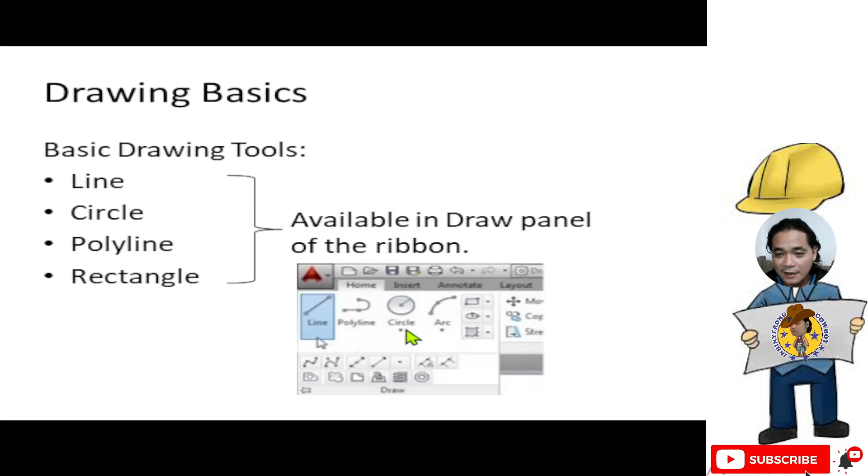Next is drawing lines. Line can be drawn by specifying its start point and end point using the line tool. Okay, so kasi guys, yung line is meron siyang distance, so may start point at end point. At yung distance na yun ay yung nagdo-drawing o yung CAD operator ang nagse-set. So tayo ang naglalagay kung ano yung distance na kailangan natin ilagay sa line. Then yung line, however, there are various methods to specify start and end of line.

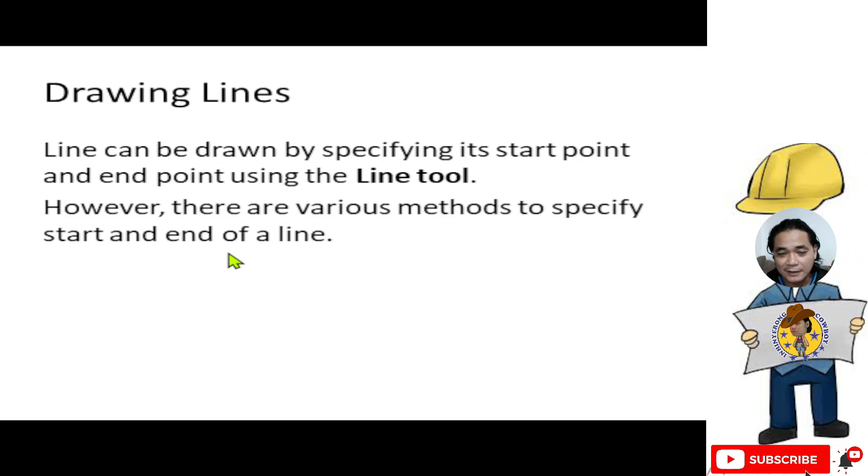Okay, so dito tayo guys sa example number 1. Ang gagamitin natin is using the absolute coordinate system. Okay, so ang una nating gagawin is you will create lines by specifying points in the absolute coordinate system.

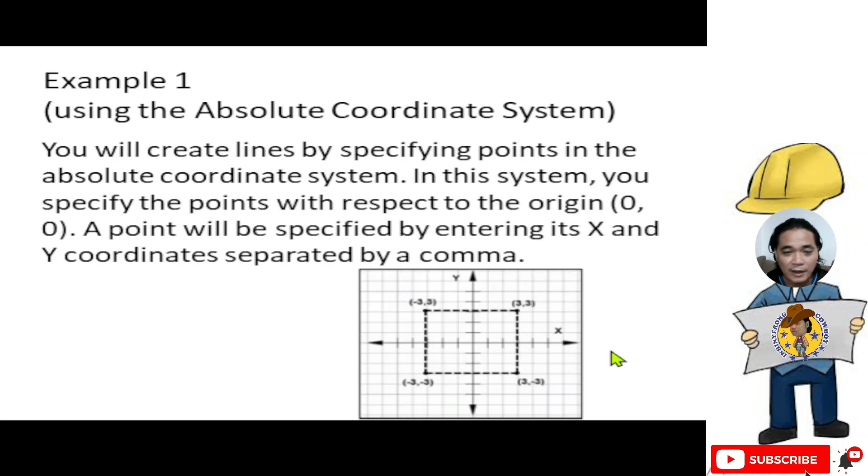Then in this system, you specify the points with respect to the origin 0,0. So ito yun, 0,0. A point will be specified by entering its x and y coordinates separated by a comma. So alam naman natin yung coordinate system ay merong positive and negative x and y component.

Okay, so assuming na na-open na natin yung AutoCAD sa ating desktop o sa ating program. So pag na-open na natin, tingnan natin, punta tayo sa ating AutoCAD. So more on hands-on tayo dito guys, maganda kung meron tayong computer, PC or laptop para masundan natin for our practice. Pero kung wala, okay lang yun.

Manood lang tayo detail by detail sa discussion, para at least pag may computer na is ma-familiarize natin kung ano yung mga na-discuss natin dito. Alam naman natin sa engineering, familiarization is very important. Pag lagi mo siyang nakikita o ginagawa, magiging familiar yung utak natin doon. Kaya nga during reviews sa mga board exams, based on my experience, yung kwarto namin dati puno siya ng formulas nakadikit sa lahat ng wall, even sa ceiling, para always namin siyang makita. Pag wake up namin, makikita namin, kaya magiging familiar kami sa mga formula.

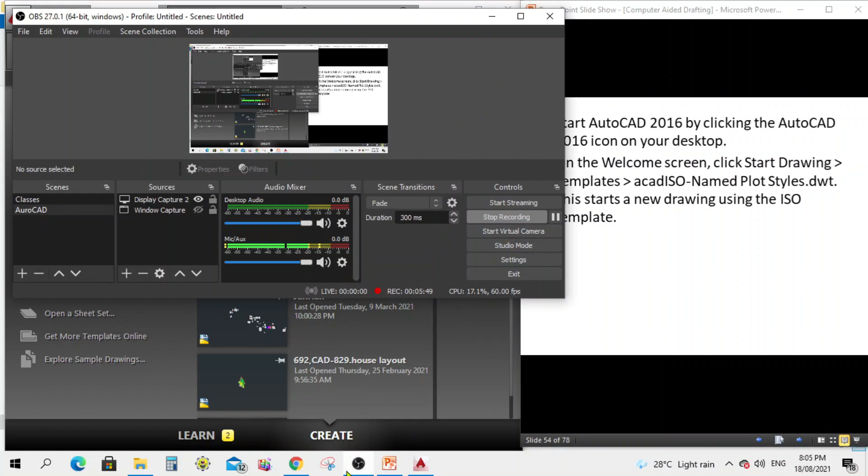Okay, so next natin, tingnan natin. So doon tayo sa ating working station, dito tayo, tingnan natin kung okay. Okay, so ito yung ating AutoCAD, then ito yung ating PowerPoint. In-split natin yung screen para maganda yung visualization natin. Okay, so ito yung ating start drawing, then ito yung ating recent drawings. Okay, on the welcome screen, click the start drawing.

Sa template, so magti-template tayo guys. Then i-select natin. Teka, medyo naglo-loading yung computer. Okay, so ito, pag click natin yung templates, lalabas ito. So ito yung mga pwede natin i-select sa templates.

So as per our procedure, ang sabi dito ay ang i-select natin ay ACAD ISO name, plot styles, DWT. Saan dito yun? ACAD name, plot styles, ito. Name, plot styles, ACAD ISO. Sorry, ISO, so itong sa baba, ACAD ISO name, plot styles, DWT. Okay, so ito ang click natin, click. Okay, so antayin natin, lalabas siya.

Okay, so next natin is i-click natin yung zoom sa navigation bar. So ito yung ating navigation bar, ito yung ating zoom, drop down, then zoom all. So as per our procedure, i-zoom all natin siya. Zoom all, okay, so na-zoom na siya. Mayroong lalabas dito sa command na specify corner. Okay, so okay na siya.

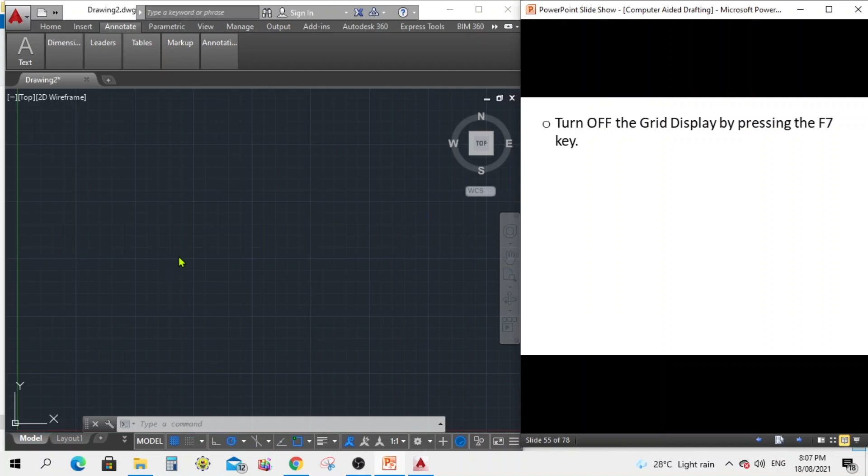F7. So nawala yung mga grid lines. Kung gusto mong ibalik, F7 ka ulit, pabalik. Okay, so as per our procedure, tanggalin natin to.

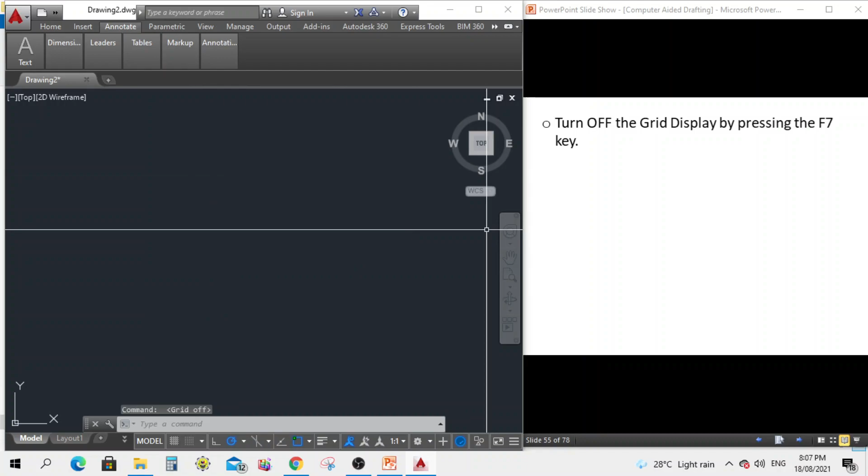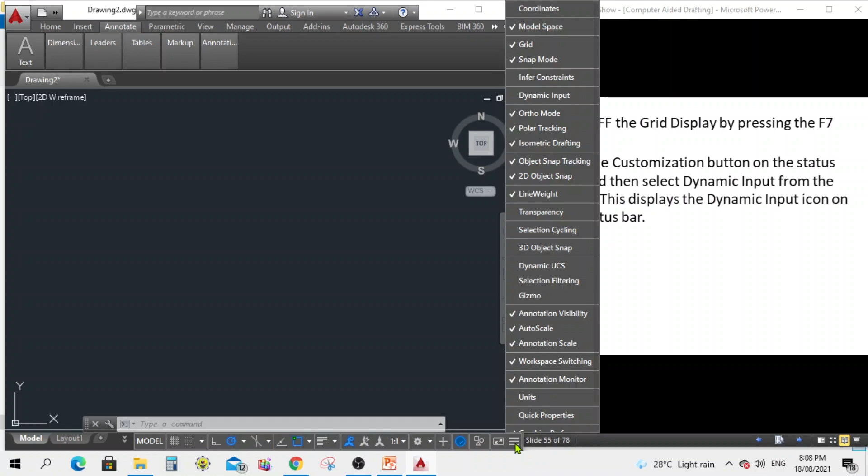Ang next procedure natin, click the customization button on the status bar and select dynamic input from the flyout. This displays the dynamic input icon on the status bar. Select natin dynamic input. So ito yung customization dynamic input.

Naka-on siya ngayon. Ang next procedure natin is turn off the dynamic input icon. You will learn about dynamic input later in this learning session. I-turn off natin siya. Ito yung ating status bar, guys.

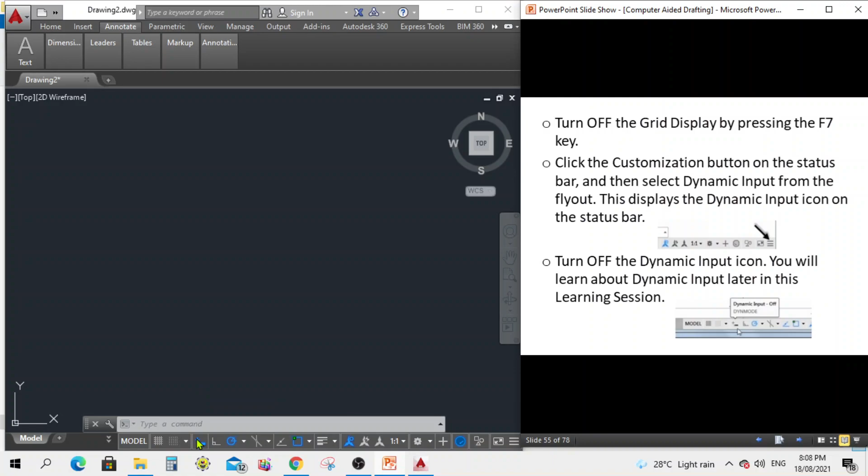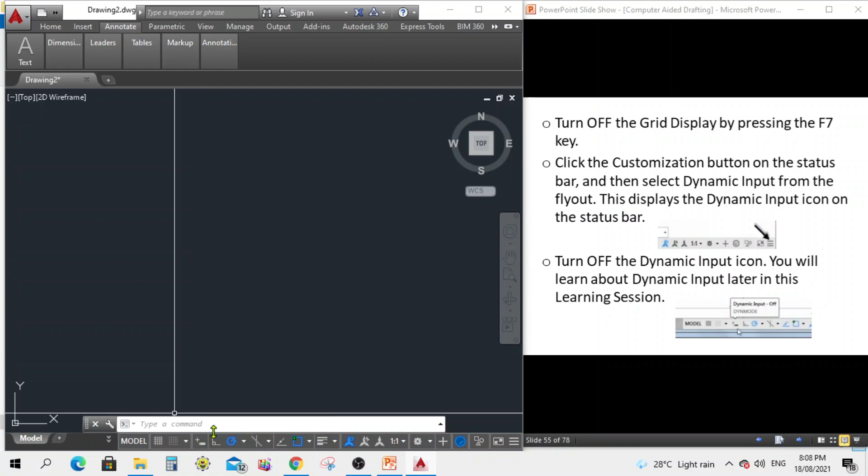So by clicking these icons, magiging off or on yung mangyayari. Pag nagla-light siya, meaning naka-on, so yung dynamic input draw is ating i-off. I-click lang natin to. Left click. Okay, nawala na yung color, meaning naka-off siya. Dynamic input is off.

Next procedure natin, gagawa na tayo ng line or drawing. So to draw a line, click home, draw line on the ribbon, or enter the line or L command. Yung dalawa yung method natin.

Pwede tayo mag-click ng home, dito sa draw, so lalabas to. Piliin natin yung line. Pwede to, i-click natin to, para makagawa na tayo ng line. Or i-type natin sa command, L kung gusto mong shortcut, o kaya i-type natin yung line. Then press enter.

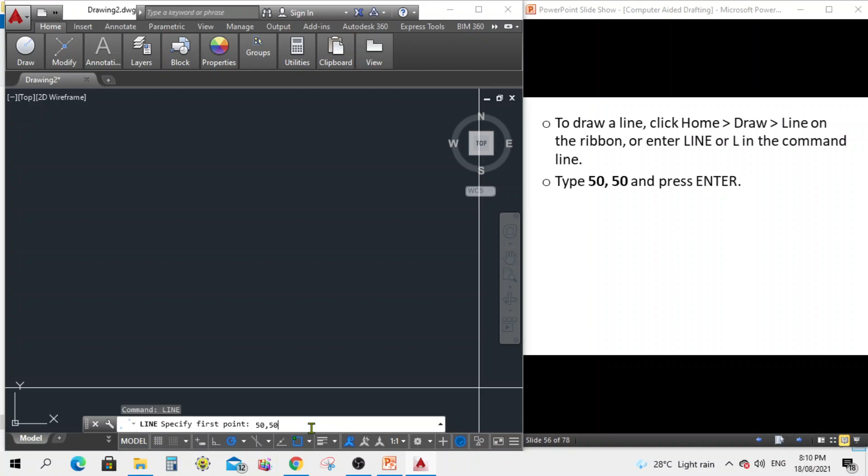Lalabas dito is line specify first point. Tingnan natin sa ating example kung ano yung point na ita-type. So 50, 50. I-type natin ang 50, 50. Then enter. Nandito yung x and y coordinate of 50, 50. Ito yung point niya.

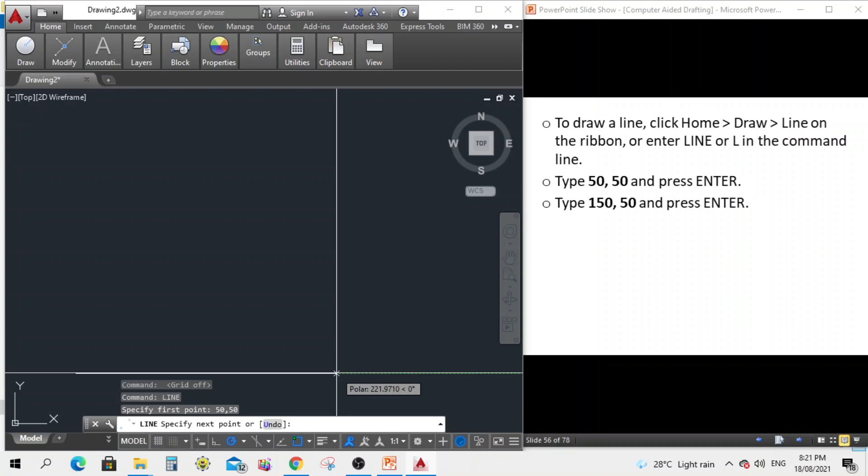Yung next procedure natin guys is 150, 50. Let's type this one in the command line. 150, 50. Press enter. Okay, so this is the line. Then next natin is 150, 100. Press enter. Ito yon yung line na nagawa natin.

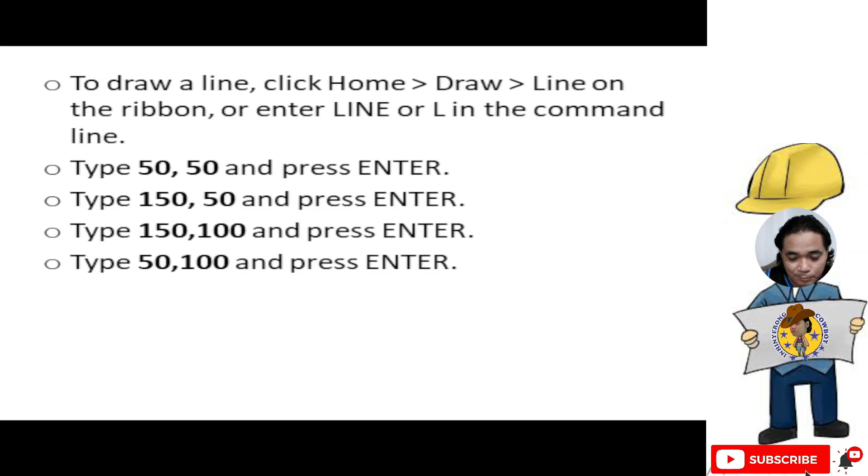Then yung next is 50, 100. Press enter. Kung napapansin natin guys, yung drawing is pwede nating i-close. Yung nakalagay sa ating command is line specify next point. Tingnan natin sa procedure: select the close option from the command line. This creates a rectangle. Ito yung close option natin.

Or pwede natin i-type yung C, then enter. Ito na yung ating drawing. So nakagawa tayo ng rectangle.

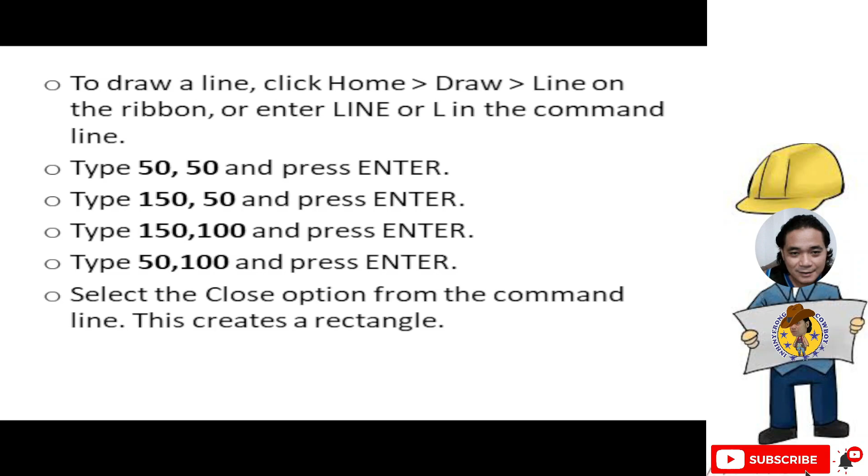Ito yung ating task natin. Ito yung kanyang mga coordinates na ginawa natin kanina: 50, 50, then 150, 50, 150, 100, then 50, 100. So all in positive axis.

Okay, so tingnan natin kung nasa saan tayo. Ito yung nagawa natin guys sa drawing. Ito yung kanyang mga coordinates. Ito yung nagawa natin sa AutoCAD.

I-review natin kung ano yung ginawa natin dito. Nung itong point na to, yung tinype natin is 50, 50. Then itong point na to is 150, 50. This point is 150, 100. Then this point is 50, 100. Then yung huling procedure natin is nag-close tayo sa drawing.

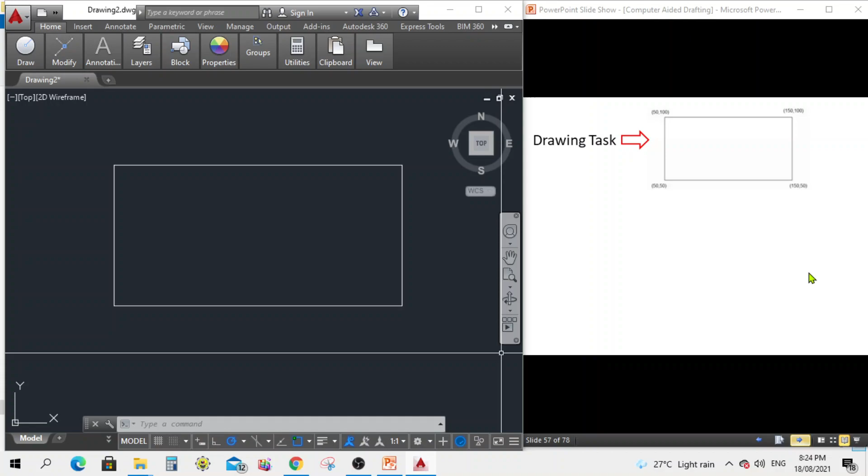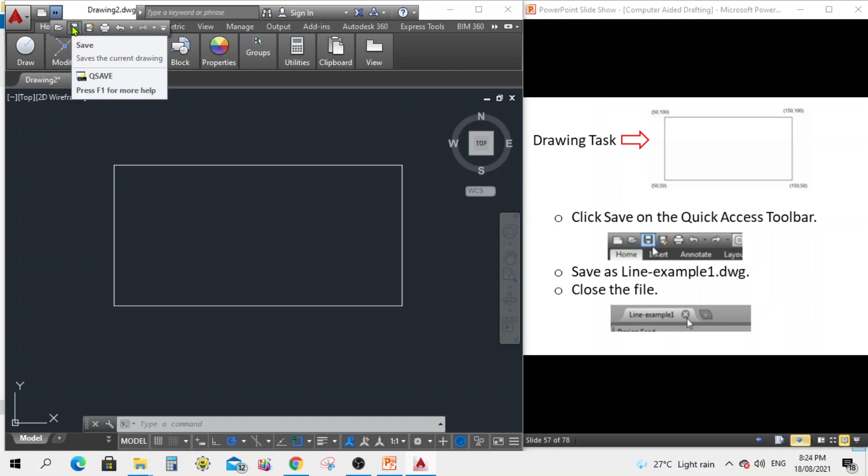Yung next natin na procedure is kailangan na nating i-save yung ating drawing. Click save sa quick access toolbar. Ang quick access toolbar natin is nandito, ito yung dalawang arrow. I-click natin to, then i-save natin. Ang ating file name is line dash example 1, drawing file. Save natin.

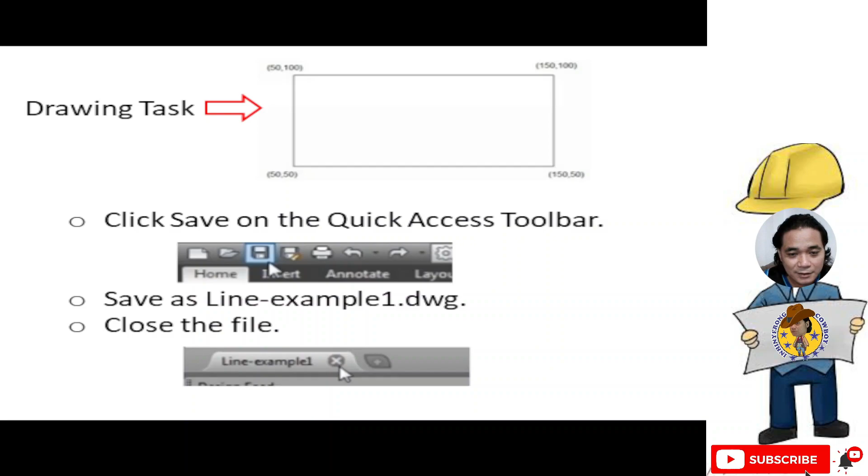Then i-close natin yung file. By closing the file, i-click yung X icon. Kung close natin to, babalik tayo sa unang page ng AutoCAD. So nung close natin siya, bumalik siya dito.

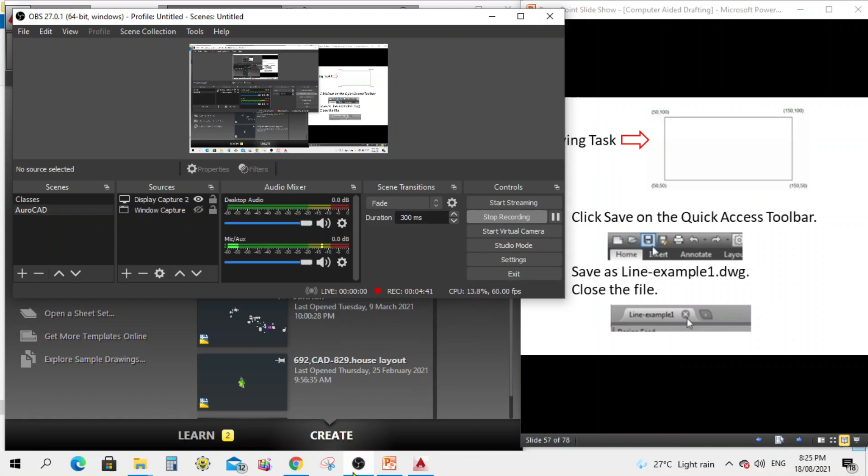Okay, so nasa ilang minutes na tayo. So nasa... Okay, so I think that is all, guys.

This is part 1 of the learning session 2 on drawing basics dito sa AutoCAD natin, guys.